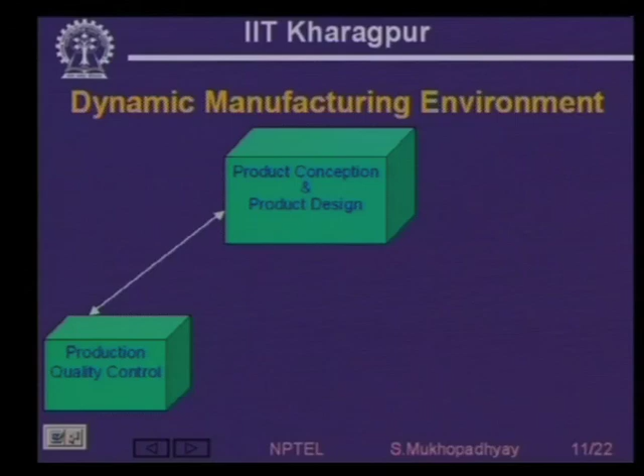So, the first phase is product conception and product design. At this stage you have conceived a product that you want to make, and you have also designed it, but once you have designed it, you have to actually plan and install equipment so that you can manufacture it. So, you have to set up your factory, you have to change your production facility.

After that you have to actually do production and you have to do quality control, and at this point it will go out of the factory into the marketplace and will get sold. From the marketplace you will get feedback of various kinds from consumer surveys, plus there is continuous R&D going on. So, people are going to come up with better material, better manufacturing processes, better controls, which will enable you to conceive new products which are improved, which will sell much more, and probably the cost of production will be less.

So, you again conceive a new product, again you design it, again you do process planning and installation and again you produce it. So, you see, this is a cycle, that a product from its time of conception up to its time of selling has a certain life. Now, this life is crucially affected by manufacturing systems. So, now let us look at what is happening to this situation.

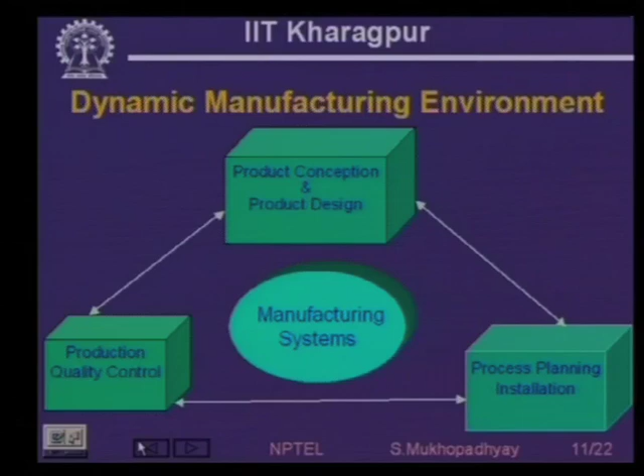So, here we have the economy of scope, and what are its features? See, competition and R&D are continuously causing product development; continuous product development is going on. So, all old products are getting replaced by new products, and this is continuous, which means that for a given product, its life cycle is getting continuously reduced.

Look at the PC market today. Roughly in 6 months' time, you are getting newer and newer versions of PCs. Change is coming from the cabinet to power supply to motherboard to RAM to displays to software. Everywhere there is change. Now, these are very sophisticated equipment. Just imagine that equipment as sophisticated as a motherboard has to be designed, produced, marketed, sold, and after 6 months it is going to be defunct, obsolete, to be replaced by another product.

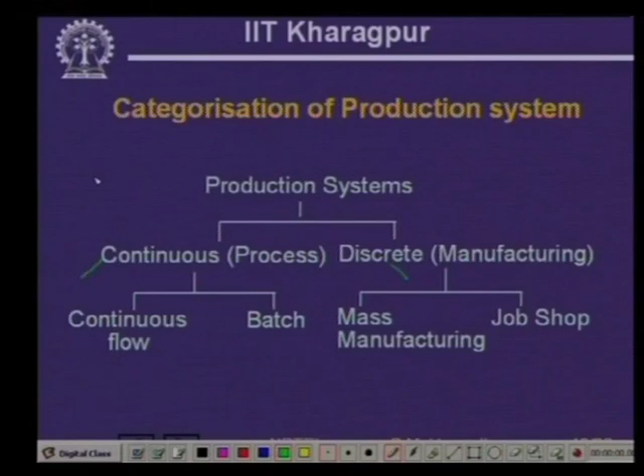Probably every customer gives an order of 100 pieces, 2000 pieces like that, but every customer comes with a unique product which not only involves different geometries, but also might involve different manufacturing processes like turning, drilling, grinding, milling, and they may be applied in different sequences. So, every job is new. This is the categorization of production systems, and if you organize them, you will see how they look on the quantity variety chart.

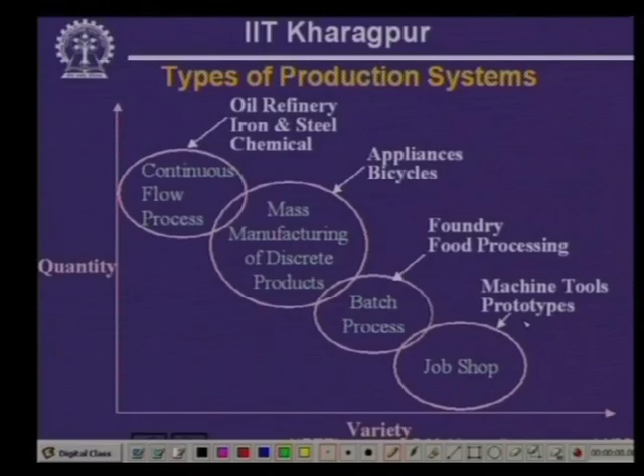These are typically continuous flow processes. Discrete manufacturing is the counterpart of continuous flow processes. There you have mass manufacturing of discrete products, so appliances, bicycles as we have discussed. In batch processing you have foundry shops where molten metal becomes casting, and each casting is actually different, casting metals could be different. Food processing, various kinds of foods get prepared. Here again variety is more, each variety's production quantity is less, and at the extreme you have job shops where every product is likely to be a new product.

So, we are trying to categorize these production systems firstly in terms of the quantity that is produced, and secondly in terms of the types of products, so the flexibility required in manufacturing. Now we will see, for these various types of production systems, how each of the various types of automation systems will be suitable for given types of industries.

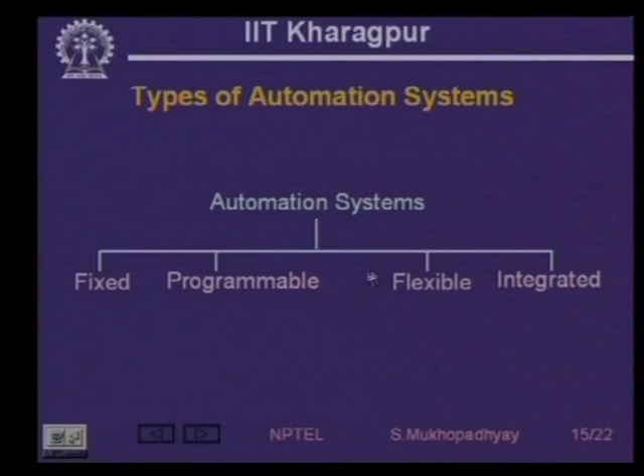So, let us see the various types of automation systems, again categorized into 4 types: fixed automation, programmable automation, flexible automation and integrated automation. Let us see what each are. Fixed automation first. In fixed automation, what are the features?

It is generally used for very high volume of production. So, you need to really tune your automation to that particular production. Equipment is very dedicated, products are not likely to change. For example, in the iron and steel industry the product variation is still there because of metallurgical research etc., but it is a much slower process and generally product lifetimes are much larger.

So there the volume is so large that by building dedicated equipment you gain so much money that it makes sense to have dedicated equipment which is low in flexibility but very highly efficient for that manufacturing process. So you basically have a very fixed and efficient operation. For example, the blast furnace or the steel melting furnace or the continuous caster are equipment which are likely to have a long life. They handle so much material, so much energy, that it makes sense to make them very tuned for efficient production.

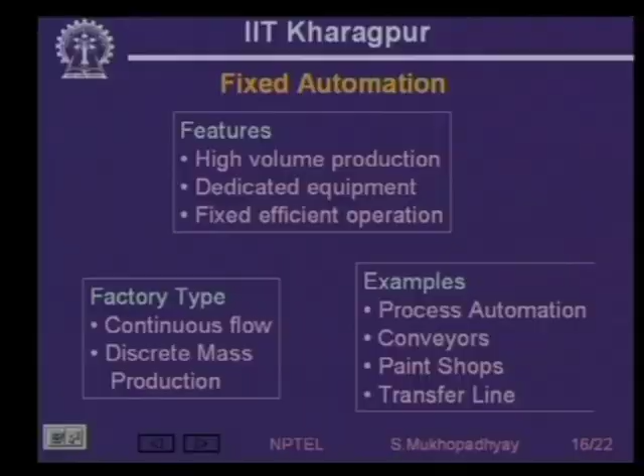So factory types are typically continuous flow and discrete mass productions. Most parts of the bicycle are likely to live for a much longer time than, let us say, a fancy watch. Examples are process automation controls for steel, oil refinery kind of things. There are some parts of automation which do not need to be changed. For example, conveyors remain nearly the same always. So that is a fixed automation.

Paint shops: generally in painting you need to put the object at one place and spray jet the paint. So the operation itself is simple and is not likely to change very much. Transfer lines: for example, the Maruti 800 stays the Maruti 800 for a long time; it keeps changing, but the changes are not very significant. So each part remains unchanged for reasonable lengths of time to make the investment on dedicated equipment meaningful.

Now let us go for programmable automation. Programmable automation is one where you need to make changes more frequently, maybe not every day or every hour, but perhaps once in a week or once in a month. Since the basic equipment life is going to be much more than a month, you need to make it programmable, so that you can reasonably easily change the sequence of operation. So it has a changeable sequence of operation and electronic controls. That is why it first came into existence in numerical controls for discrete production.

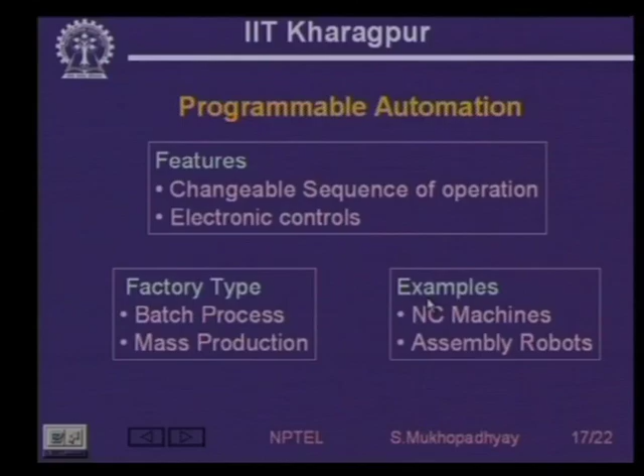So again you have batch process, or mass production, but now your product variety has increased, so you need to make changes. It should be reasonably fast; it need not be done by operators, but can be done by engineers. If you want to change it every month, then for changing you need to take less than a day, that kind of automation. Examples will be numerically controlled machines and various kinds of assembly robots which pick a part and put it at a different place. If the sequence changes, the assembly robot also needs to be changed so that it can pick parts from a different place and place them at a different place.

Contrasted to this, as the economy of scope increases, we have various kinds of industries where things change very fast. There we have flexible automation. Now changes will be made several times in a day and will have to be made by operators, and they have to be made fast, because if the change takes time, you lose out on idle time. You want to maximize production time. So machines are now computer controlled, maybe with graphical user interfaces, so that operators know how to operate them, and very many of these changes should be pre-programmed, so the operator typically makes a choice among certain configurations, probably adjusts some parameters, and the rest is done automatically.

Similarly, material handling should also be programmed, because if the sequence changes, parts will have to travel from one place to another. If you use fixed material handling equipment, you cannot transfer parts from one place to another very flexibly. That is why you need programmable material handling. Factory types are job shops, where every part requires a different sequence, and also batch processes, where depending on batch size the sequence of process operations will change. Examples are CNC machining centers and automatic guided vehicles.

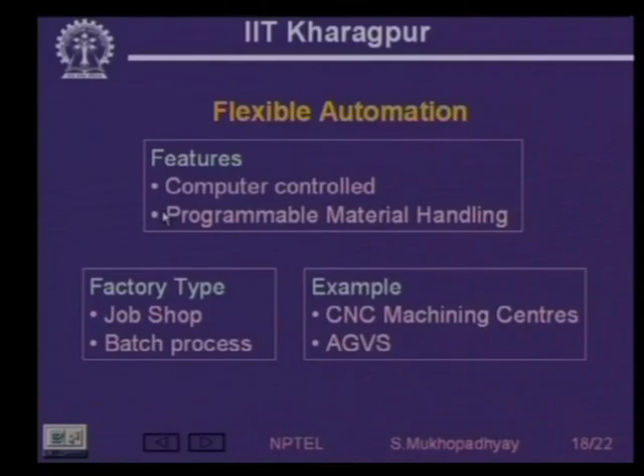Now all these, fixed, programmable and flexible, are mainly concerned with automation over a limited spatial range. You are talking about local automation, maybe within a shop, or parts of a shop, or involving just one or two machines. If you want to control the whole factory in a very integrated and optimal manner, you need to integrate all the automation systems, make them coordinated and make them talk to each other. That is called integrated automation, where you have whole factories under automation systems. So what are these features?

First feature, these are actually the most expensive variety of automation, and they are firstly characterized by advanced optimizing algorithms. That is, there is a lot of knowledge built into these machines. They actually do a lot of mathematical calculations based on very sophisticated models, and there are very few vendors who have got that knowledge, and they generally do international business. So international companies like, let us say, Voest-Alpine, they are steel making consultants, and they give their consultancies to factories the world over, right. So they use very advanced knowledge and algorithms, obviously based on computers.

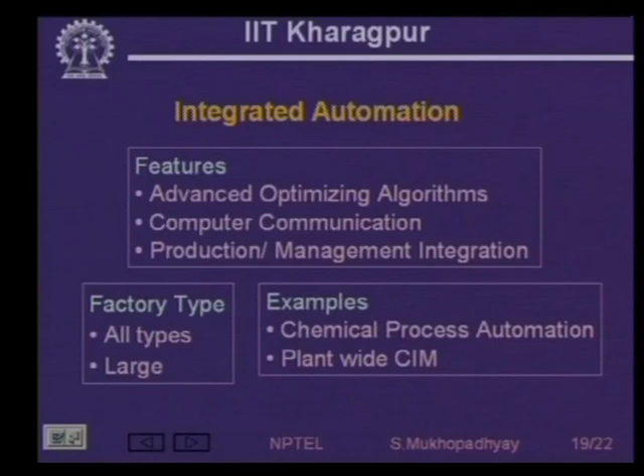So now we have seen that as we go for various kinds of factories, you also need various kinds of automation for them. So for machines in steel plants, you may be requiring very fixed type of automation locally, but for coordination, for example, coordination between the steel melting shop and the continuous caster. You see, in the steel melting shop you are pouring out hot steel. So this hot steel has to be taken by a material handling system to the continuous caster, where it has to be cast.

Now if for some reason this continuous caster and steel melting shop are not synchronized, then your ladle in which you are carrying the hot metal to the caster may have to wait at various places due to various problems, and in this process it may get cold. You can only pour this steel into the continuous caster when the steel has a certain temperature. So, if you cannot ensure effective coordination, you can suffer very large losses, because a particular ladle could not be put into the continuous caster and had to be put into the slab caster, where the steel will sell at a much lower price. So, for steel factories you need one kind of combination.

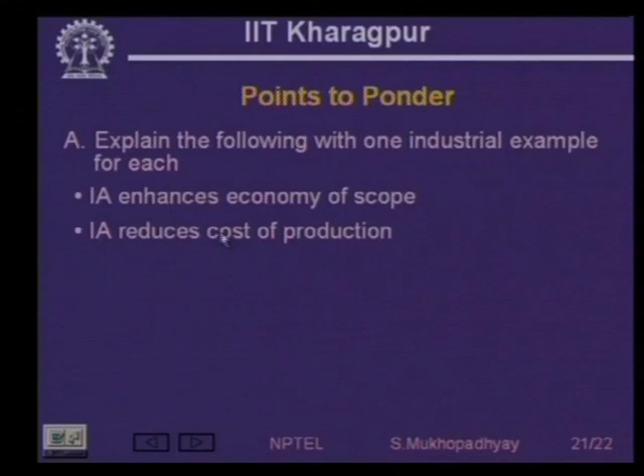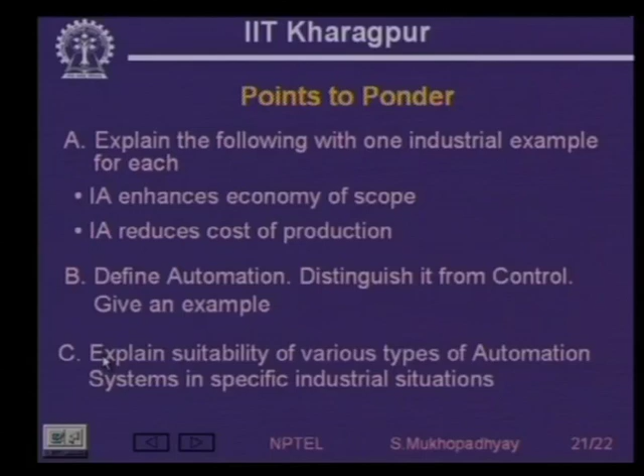Here are some questions which you can look at. For example, you could try to give examples of how industrial automation enhances economy of scope. You can give an example from a particular type of industry. You can also explain in a given industrial context how it reduces cost of production. You can define automation and distinguish it from control, give an example, or explain suitability of various types of automation systems in specific industrial situations.

So, that is all for today. Thank you very much. We will see the architecture of industrial automation systems in our next lesson.